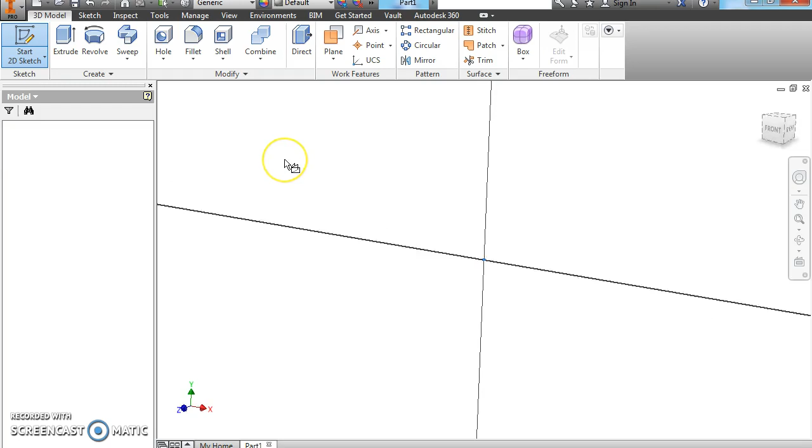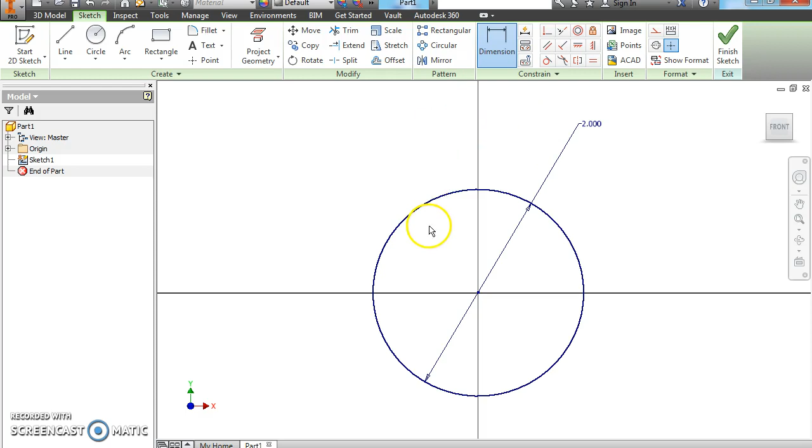So we're going to make 3 parts first, in part 1. The first thing I want you to do is, starting on the XY plane, make a circle. Let's give it a dimension of 1.5 inches. Actually, let's go ahead and make it 2 inches. Then I want you to extrude that, finish the 2D sketch. Let's do a symmetric extrude, and let's go 3 inches.

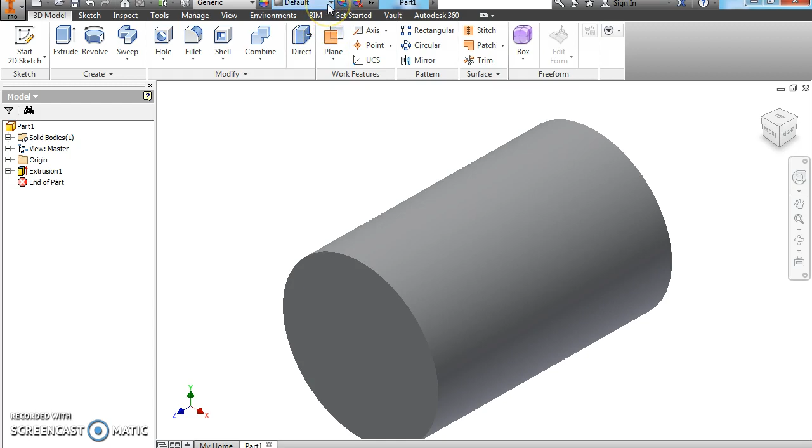Okay, now you can make this any color you want and change the color. Let's go with orange for this one. Once you've done that, 2 inches in diameter, extruded 3 inches, do a file, save as.

Save it as assembly cylinder.

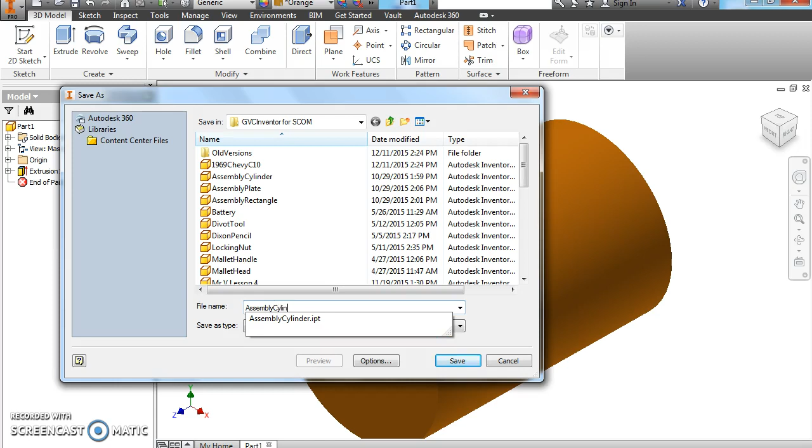Okay, we've done that, so the next thing we're going to do is make another part file, Standard IN. This time we're going to make a square peg, that's what we're going to call it. So start with your sketch, keep it in the XY plane. We want to make a rectangle.

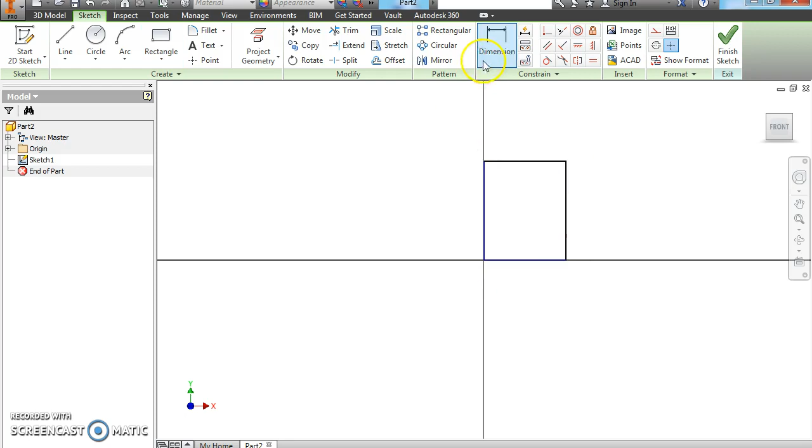Our cylinder was 2 inches in diameter, we're going to do the same thing here. Okay, so we've got a 2 by 2 square. Make sure you've got the dimensions, and it has constraints built in where the opposite sides are parallel, and they should already be there. Let's see if we show constraints.

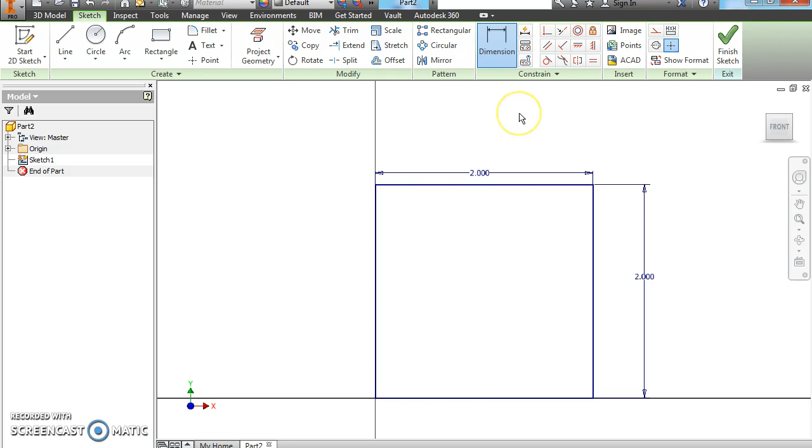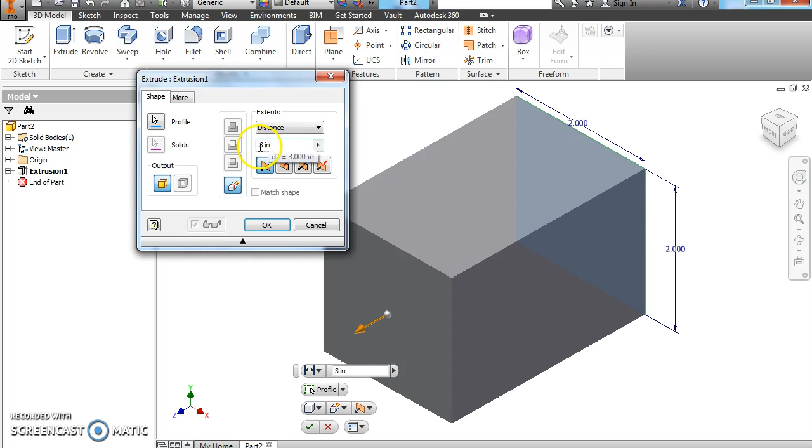Okay, so we're there. Finish 2D sketch, re-zoom it. Again, you want to extrude this one 3 inches as well. Let's change that, let's make it 4.

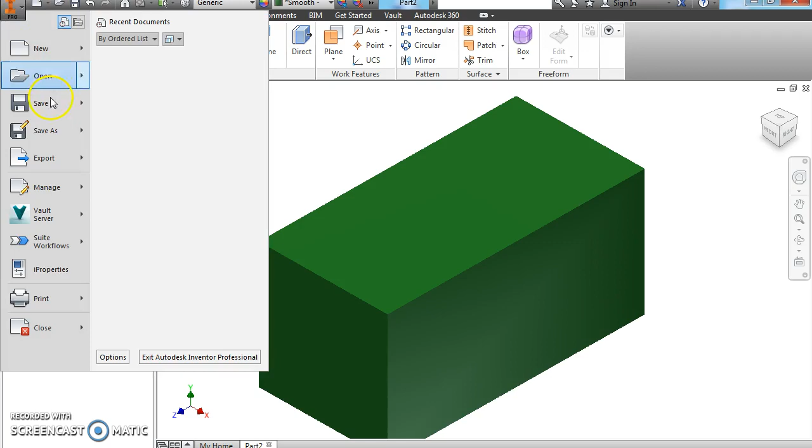Okay, again, pick a color. Let's go with a smooth green. Okay, save this, file, save as assembly square.

And you can see I'm putting 2's on there. I've done this before, but I'm changing it. It's going to be a little bit different now.

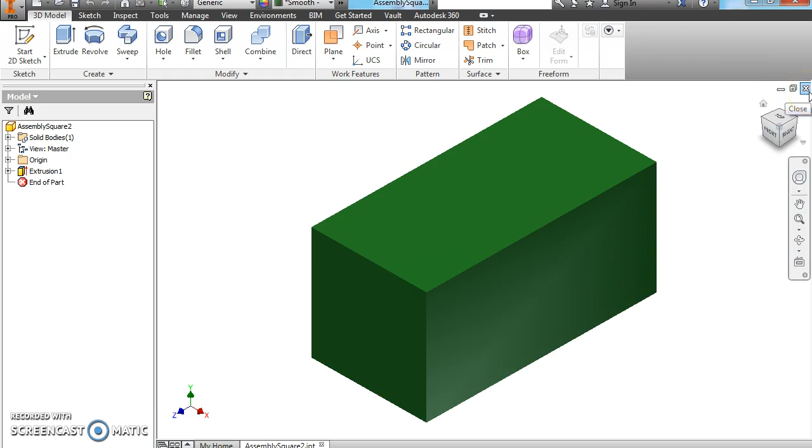Okay, that's our second part, and we're going to make one more, actually 2 more parts. The next one we're going to do is a triangle. Again, keep your XY plane. Starting at the origin is a good thing.

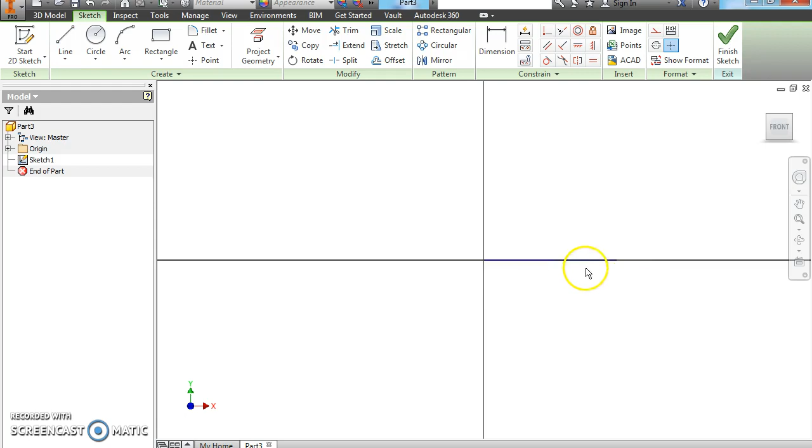Let's do that. Okay, so you've made that line. Let's dimension it to 2 inches. Okay, I'm going to move that up. Actually, it's pretty tough to see. Move the line.

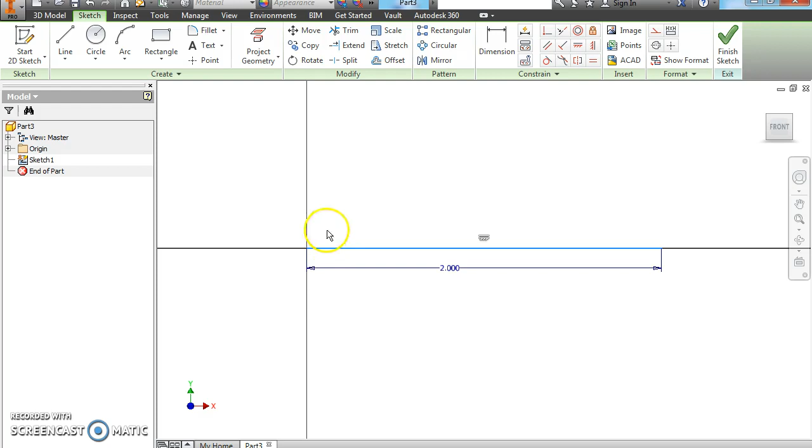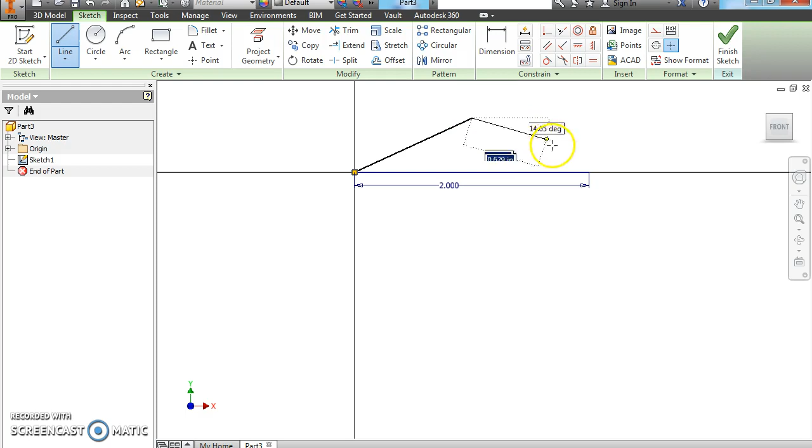And it's not going to... that's okay. We're also going to make another line. So find the center point and hover over that, and it'll turn green. And then you want to go back to your origin, and back here.

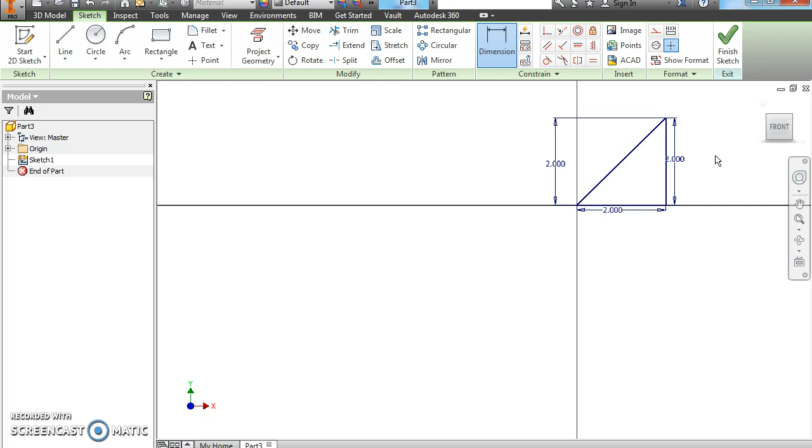So now it makes a right triangle, that's not what we want. We want an equilateral, so let's try something here. Let's try a vertical constraint, may have to go in and delete the dimensions, which is okay. And how I did that, I'm going to back it up here. Okay, we've got a right triangle, 2-inch sides we dimensioned, but it turned into a right triangle. That's obviously not what we want.

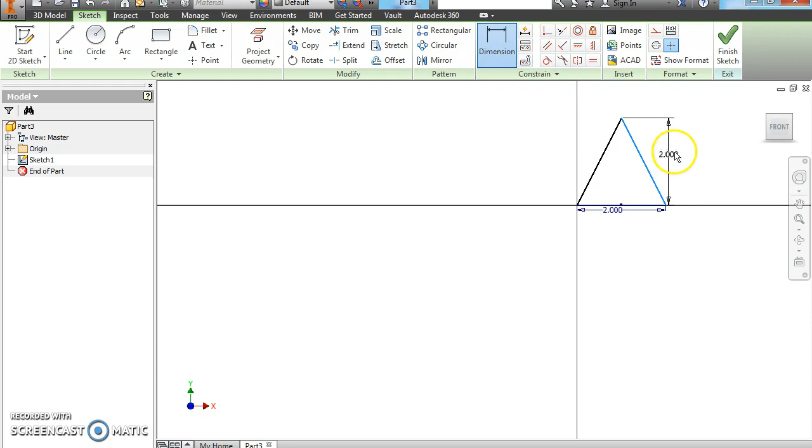We want an equilateral triangle, so we're going to do a vertical constraint, which you've done in lesson 4, with this point here, the vertex of the triangle, and the halfway point of our base, or the midpoint. You do that, right click OK, and let's check our dimensions. I bet you it's still 2 inches, and it is. It won't let you do that side because it's locked in with it. Okay, so make sure it looks like this.

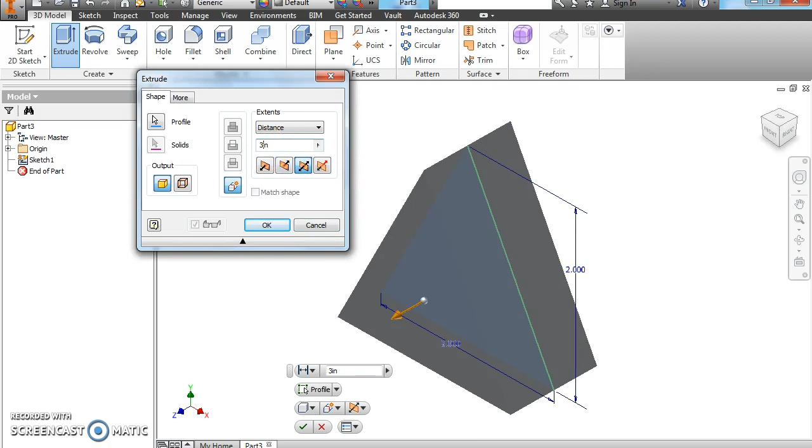We're going to finish 2D sketch, we're going to extrude this as well, and let's go 3 inches here. I've got an orange and green, let's go with blue on this one.

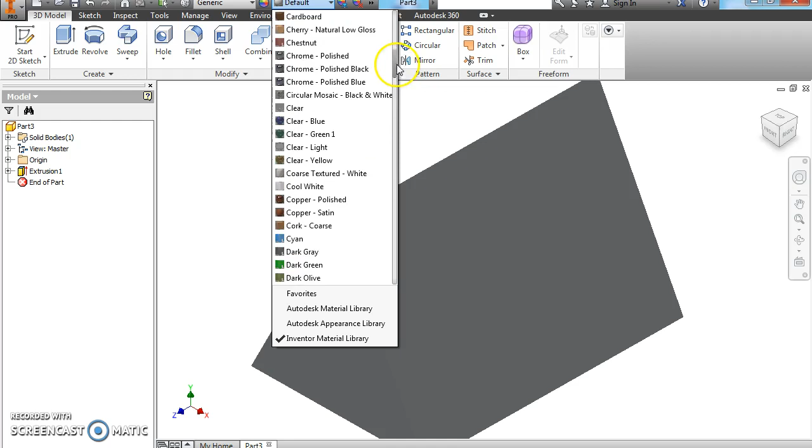Not a smooth blue, is there? Here's our blue. Okay, and we're going to save this as assembly triangle. So that's our third part, and we've got one more.

We've got the thing we're going to actually insert these parts to. So our last one.

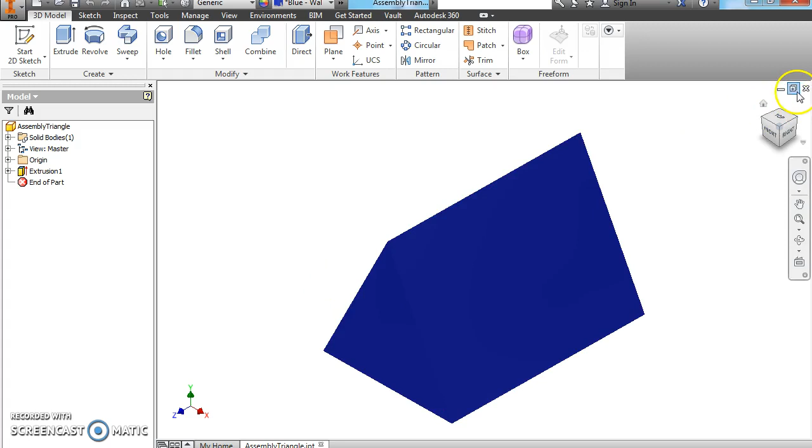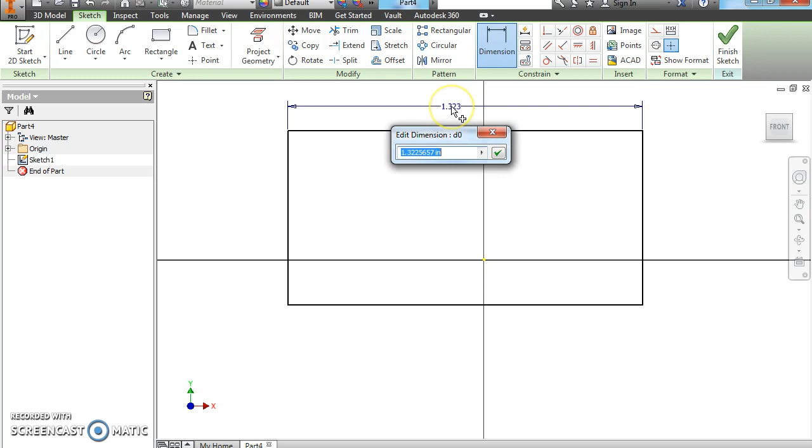Choose your XY plane. Make a rectangle. I want you to dimension it to be 9 on the top, and then 7 height, so 9 by 7 rectangle.

There's actually a couple ways we can go about doing this. We're going to put our square, our circle, and our triangle in here, and we're going to insert those pegs. If you were a little kid, you may remember having a pegboard toy where you put it through there.

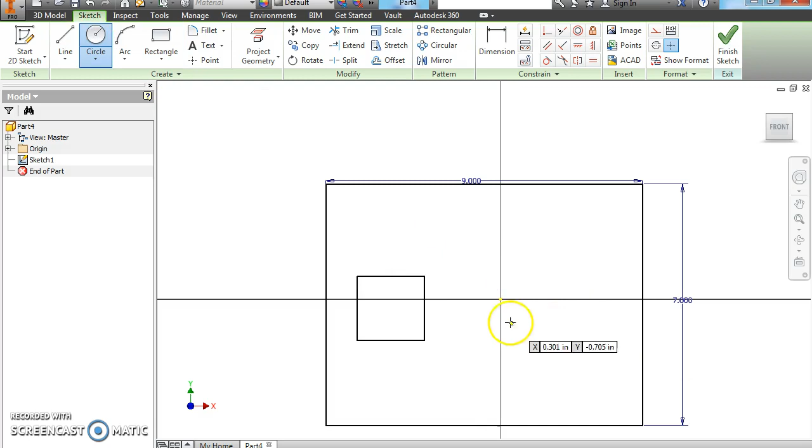So our rectangle was 2 inches. Our circle was 2 inches. And so was our triangle. Okay, let's see if we can fit all this. I may have to change this.

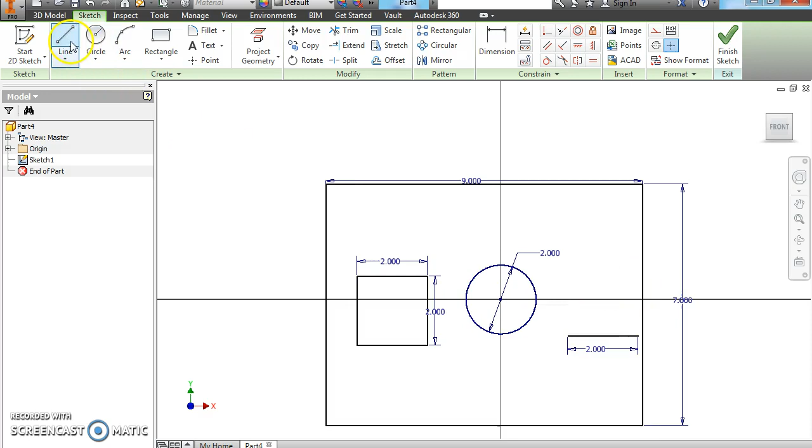Okay, dimension that to 2, to 2, to 2. Let's draw our line. Always make sure you connect.

And I'm going to do that vertical constraint again, this vertex to the midpoint, which is okay. Let's see if it'll do this. Should do it to both sides, and it does.

Okay, that's a pretty tight fit, so instead of 9 inches, let's change that to 11, and that gives us a little bit more room to work with.

Now we're going to go and add some constraints to get this where it's all lined up and looks good. So let's do a vertical constraint with the midpoint and the circle. And you see it shifted everything over.

Okay, let's do a horizontal constraint with the midpoint here and here. Okay, see if you can find it there. There, it moves that up. That's going to be tough. Here and here. Okay, and everything's lined up and centered good.

Probably put a little bit more space. See what this is. Okay, 1.48. Let's make it 1.5.

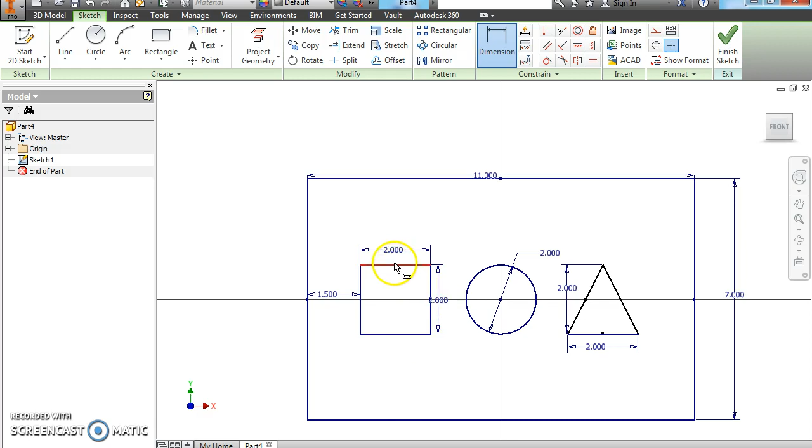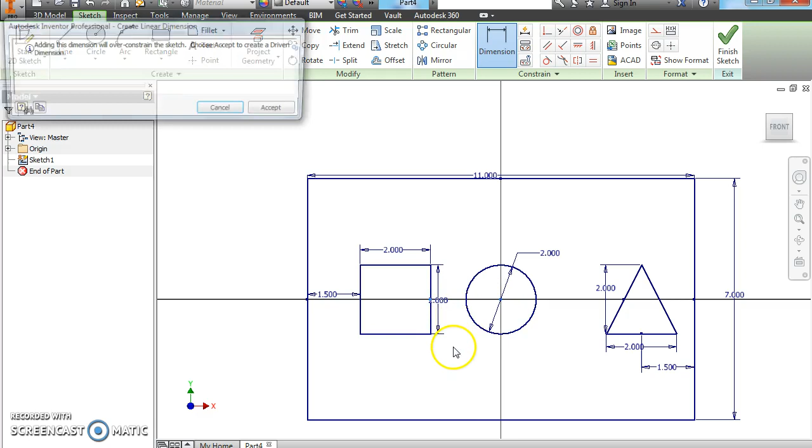Make that 1.5 as well. From here, there. Okay, instead of 1.5 here, let's make it 2. Okay, from the halfway point of the base of your triangle to this end.

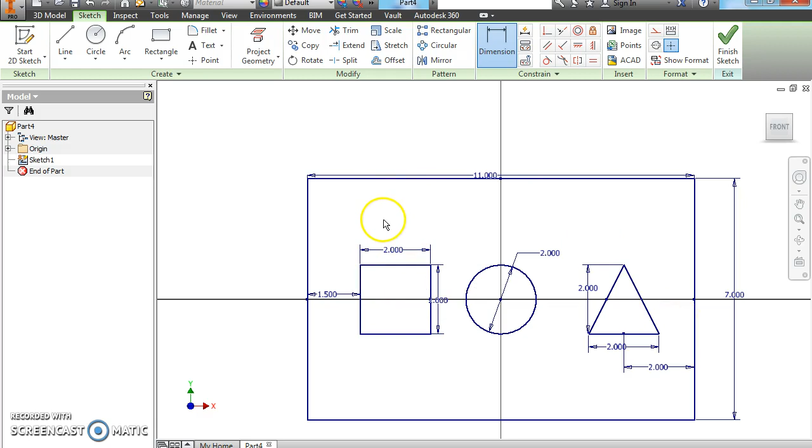Okay, so now we've got a plate where we're going to go and insert those. So right click, finish 2D sketch. I'm going to zoom in so you can see all the constraints again.

Okay, you have an 11 by 7 rectangle, a 2 by 2 square that's 1.5 inches, and we've done vertical and horizontal constraints with this midpoint and the center point of the circle, the midpoint of this line. The circle, we did a vertical constraint with the middle of the overall rectangle. From the midpoint of your base to here is 2 inches. So this is pretty complex, a lot of dimensions.

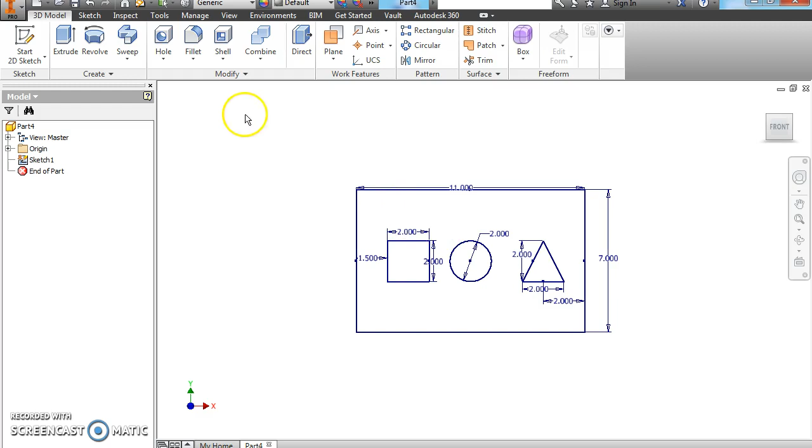Let's extrude this. Do a symmetric extrusion. I think let's go 0.5 or a half inch. Okay.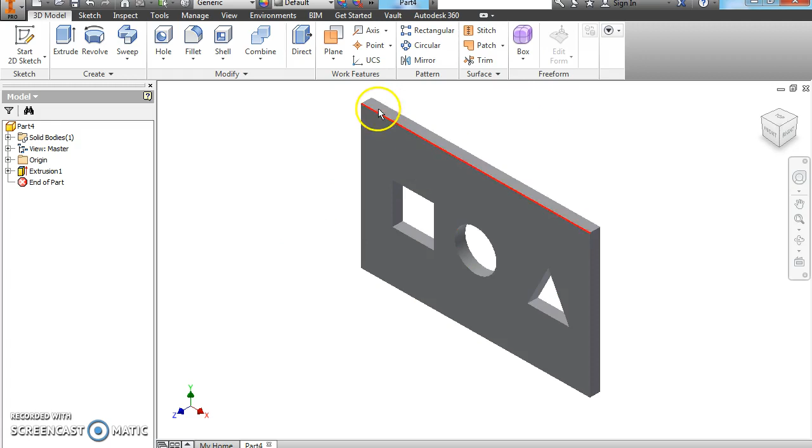And again, I want you to pick a color for this. I'm going to make mine wood. Okay, you can see walnut is the name of it.

Save that as assembly plate.

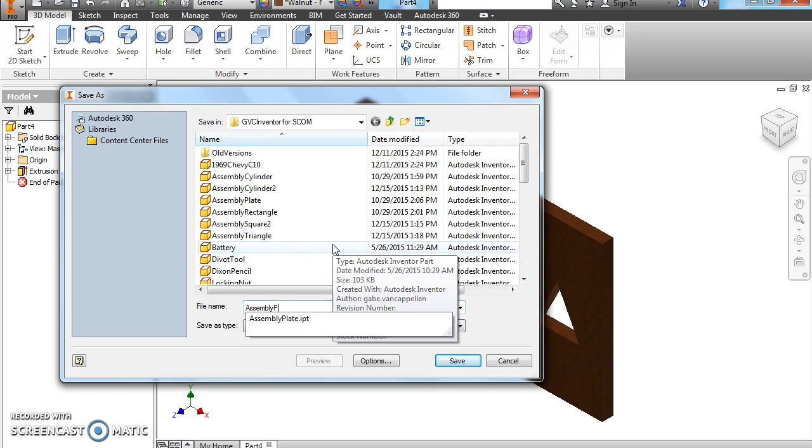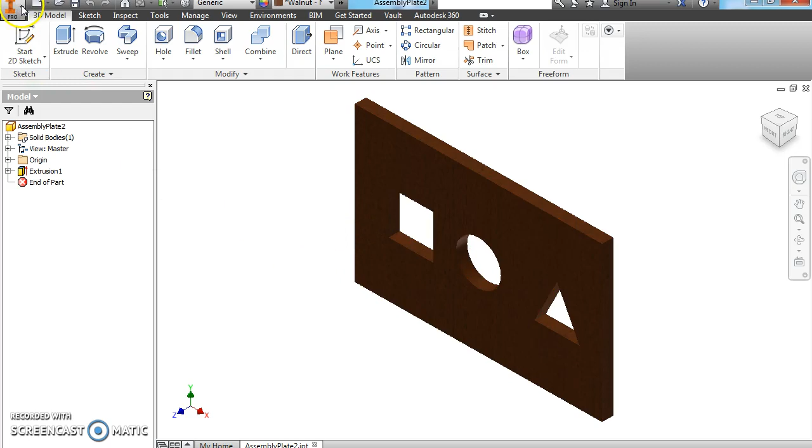Okay, so we're done with the first part. We've made our 4 part files. In the next video we're going to do an assembly file, which you haven't done yet, and you're going to learn how to put those pegs we made into these open spaces. Okay, so save this, or you saved all your separate part files, and we're done for this part. On part 2 we're going to do an assembly.